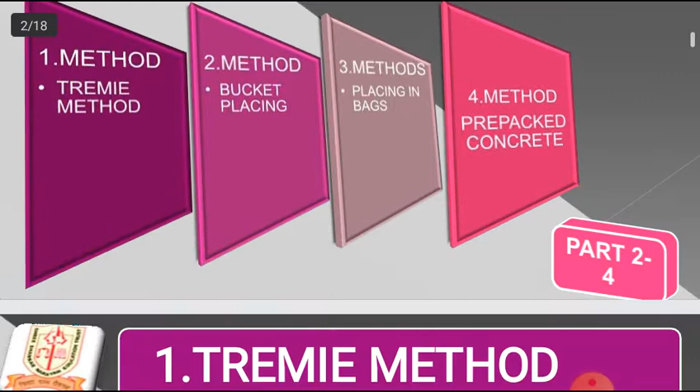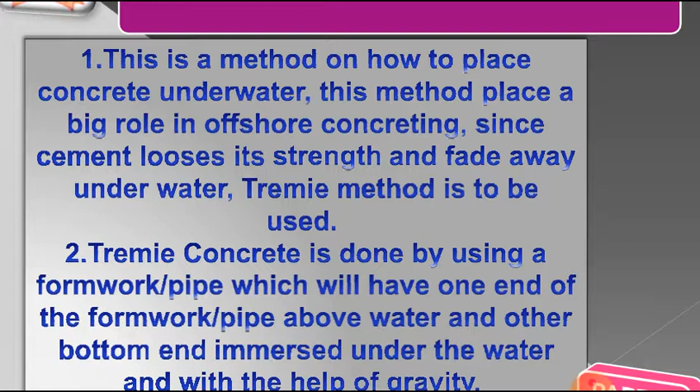The first one is the tremie method. This method plays a big role in offshore concreting since cement loses its strength and fades away underwater, so in this place a tremie method is to be used.

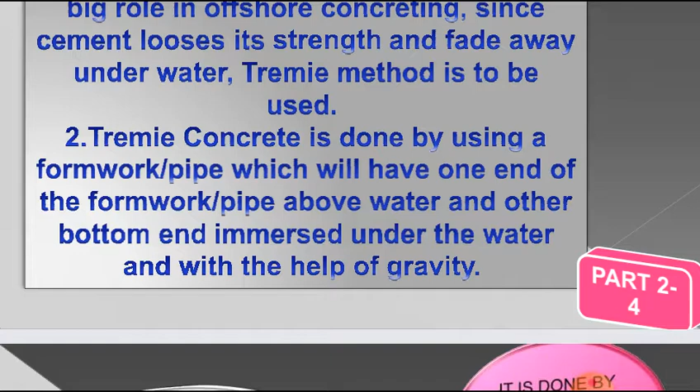This tremie concrete is done by using a formwork or pipe which will have one end above water and the other bottom end immersed under the water with the help of gravity. So here in this picture, it is done by placing pipes, one end in the water and one outside.

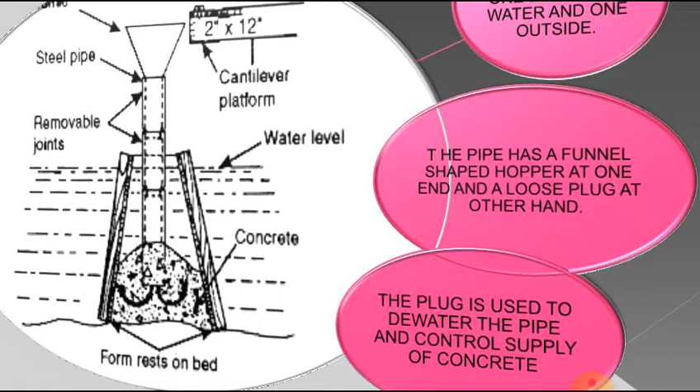The pipe has a funnel-shaped hopper at one end, that is at the top, and a loose plug at the other end, that is at the bottom. The plug is used to dewater the pipe and control the supply of concrete.

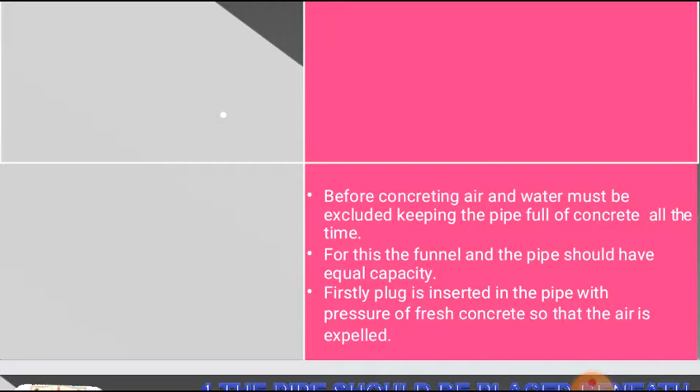Before concreting, air and water must be excluded, keeping the pipe full of concrete all the time. For this, the funnel and the pipe should have equal capacity. Firstly, the plug is inserted in the pipe with pressure of fresh concrete so that the air is expelled.

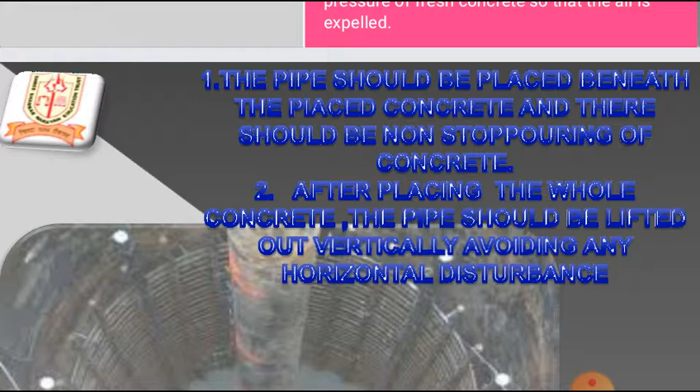The pipe should be placed beneath the placed concrete, and there should be a non-stop pouring of concrete. After placing the whole concrete, the pipe should be lifted out vertically, avoiding any horizontal disturbance. So it looks like this - the concrete is poured.

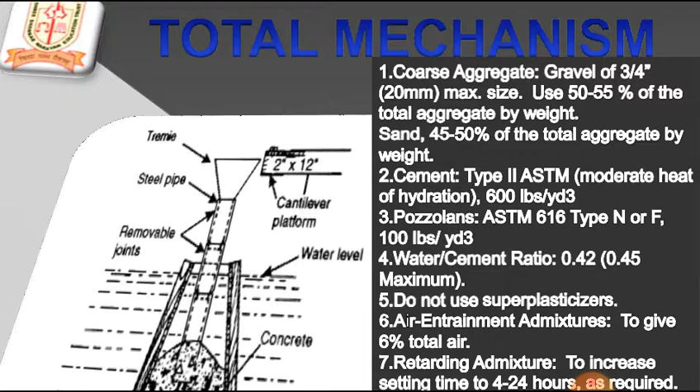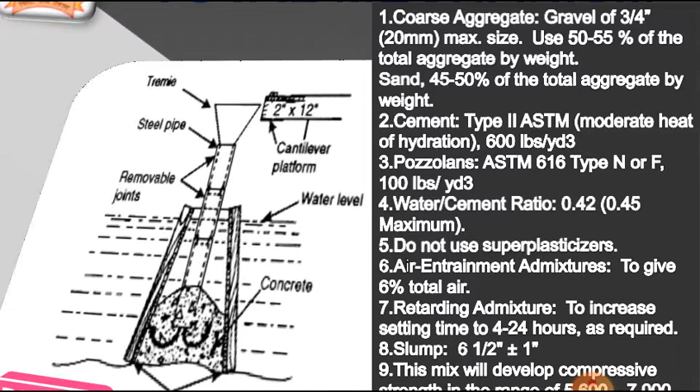Some basic information about the ingredients: the coarse aggregate is maximum 20 mm size, used at 50 to 55% of the total aggregate by weight, and sand is 45 to 50% of the total aggregate by weight. The cement is type 2 ASTM, and the pozzolans are ASTM 616 type N or F. The water cement ratio maximum is 0.45, and we should not use super plasticizers. The air entrained admixtures are used to give 6% total air.

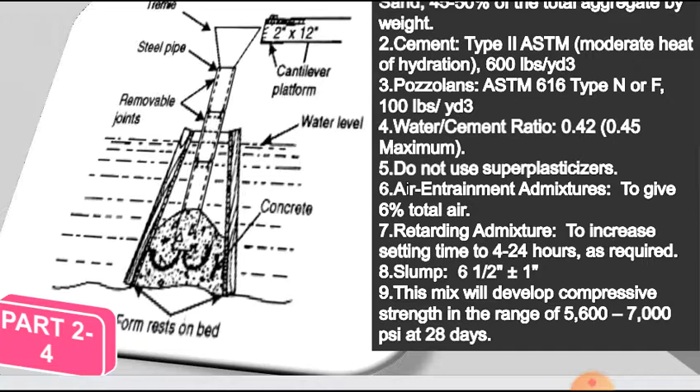The retarding admixture increases setting time to 4 to 24 hours as required, and the slump is 6.5 inches plus or minus 1. This mix will develop compressive strength in the range of 5,600 to 7,000 psi at 28 days. The next method is underwater concreting by bucket placing method.

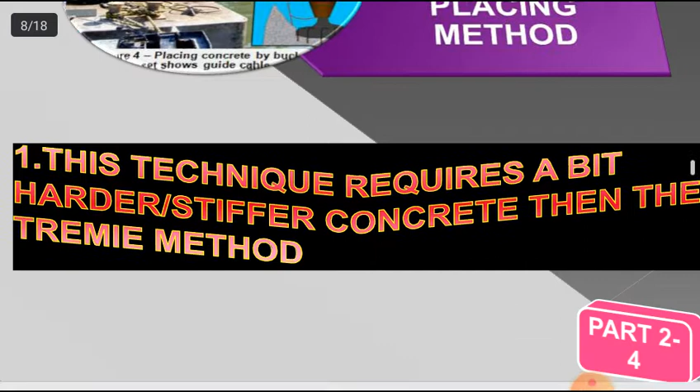This technique requires a bit harder or stiffer concrete than the tremie method. The buckets are usually fitted with a drop bottom or a bottom roller gate which opens freely outward when tripped.

The bucket is fully filled with concrete and its top covered with a canvas cloth or gunny bag to avoid disturbance of concrete as the bucket is lowered within water.

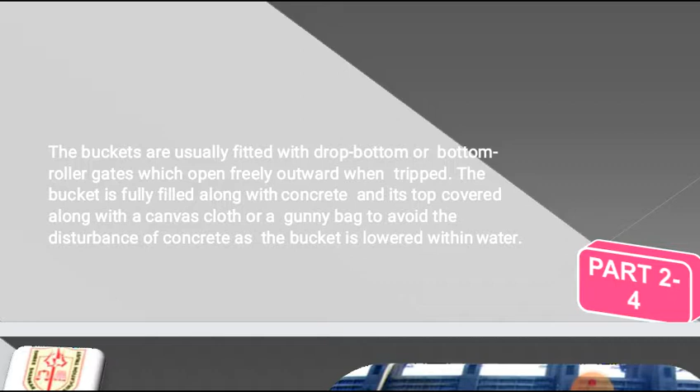So in this picture we can see the bucket is lowered through a crane up to the bottom surface of concrete and then opened by a suitable arrangement provided at the top. The concrete should be discharged straight against the surface on which it is deposited.

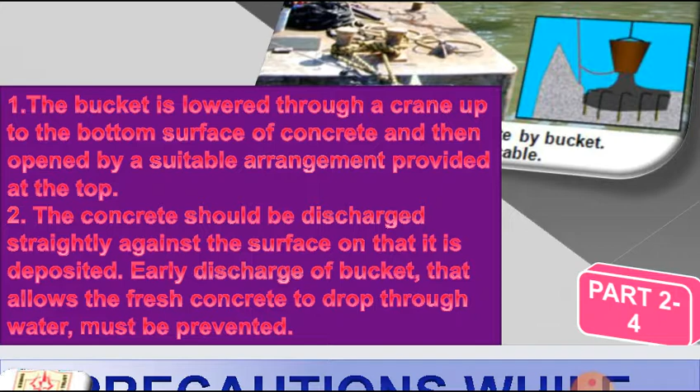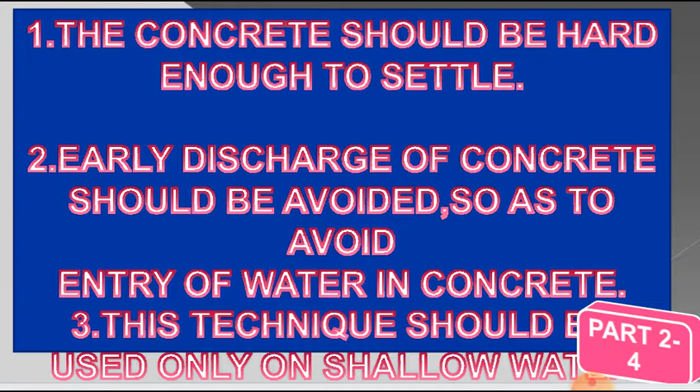Early discharge of the bucket that allows fresh concrete to drop through water must be prevented. Some precautions: concrete should be hard enough to settle, and early discharge should be avoided so as to avoid entry of water into concrete. This technique should be used only in shallow water.

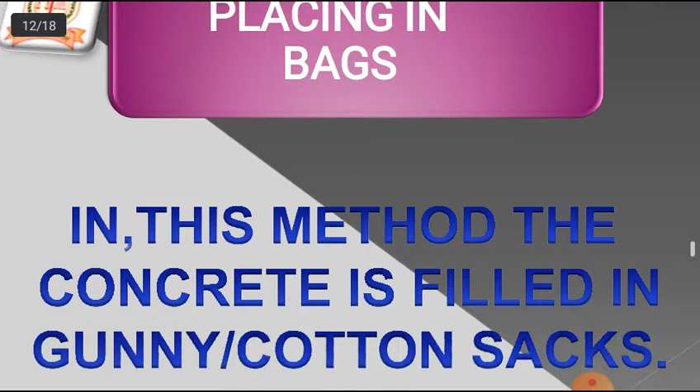The next method is placing in bags. In this method the concrete is filled either in gunny or cotton sacks.

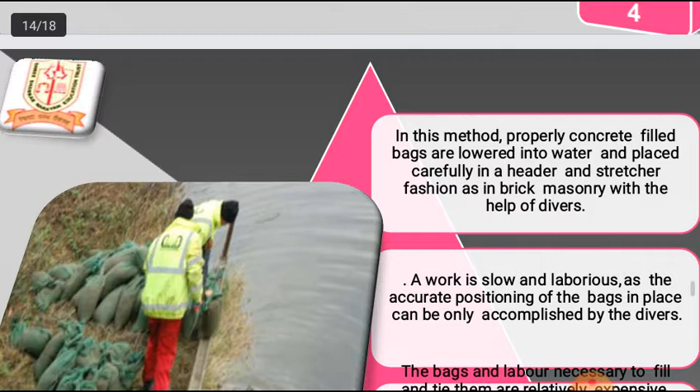So in this picture we can see, in this method, properly concrete-filled bags are lowered into the water and placed carefully in a header and stretcher fashion as in brick masonry with the help of divers. All the gunny bags filled with concrete are placed in a stretcher and header manner as done in brick masonry.

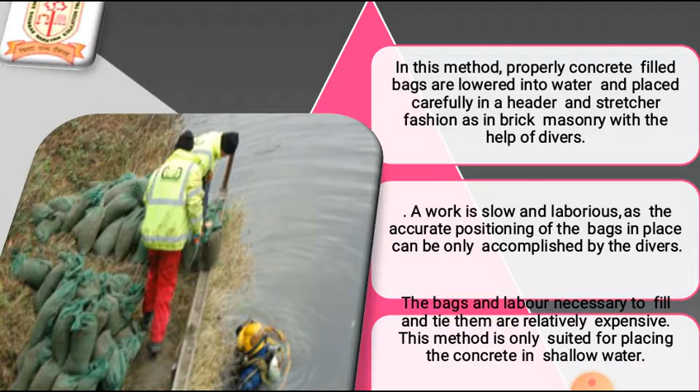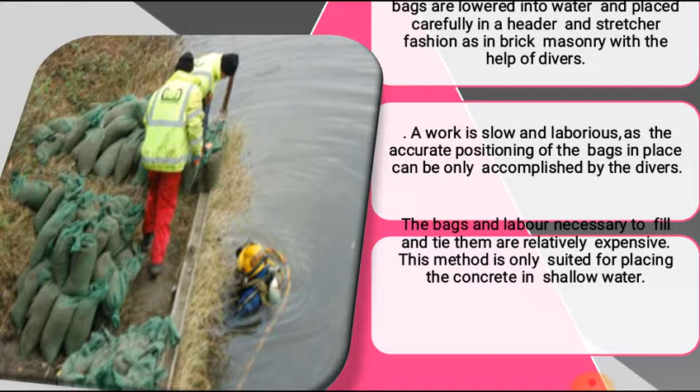This work is slow and laborious as accurate positioning of the bags in place can only be accomplished by divers. The bags and the labor necessary to fill and tie them are relatively expensive, so this method is only suited for placing concrete in shallow water.

The last method is pre-packed concrete. In this method, the aggregate should be wetted before placing in position. This method is also called grouted concrete.

It consists of placing the coarse aggregate only in the form and thoroughly compacting it to form a pre-packed mass. This mass is then grouted with cement mortar of the required proportions. The mortar that grouts the concrete displaces water and fills the voids.

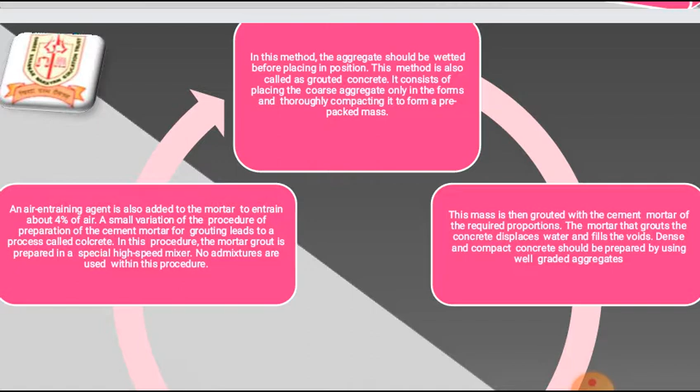Dense and compact concrete should be prepared using well-graded aggregates. The maximum size of aggregate is 80 mm, and the coarse aggregate may also be allowed to fall from a height of up to 4 meters without causing any appreciable segregation. Just shutter vibration could be used to compact the coarse aggregates.

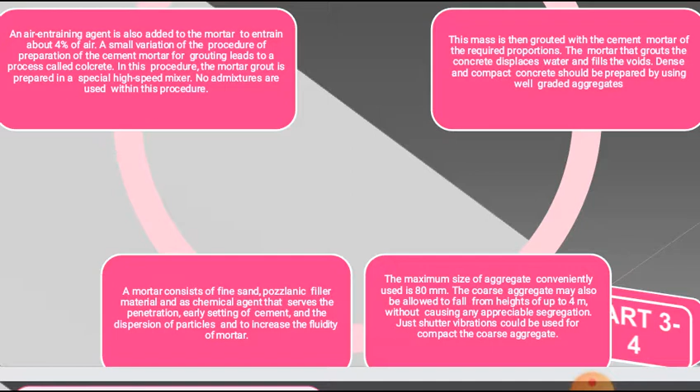A mortar consists of fine sand, pozzolanic filler material, and a chemical agent that serves penetration, early setting of cement, dispersion of particles, and increases fluidity of the mortar. An air entraining agent is also added to the mortar to entrain about 4% of air.

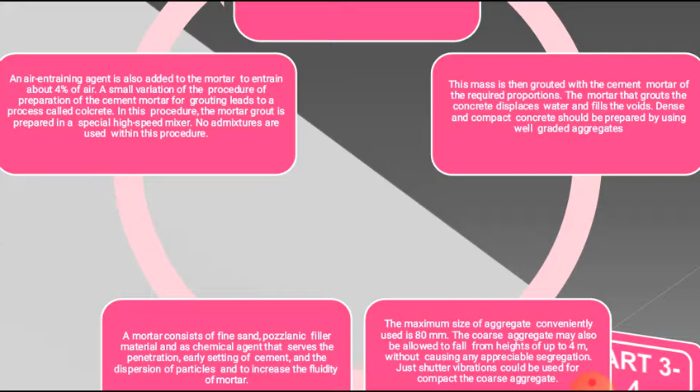A small variation of the procedure of preparation of the cement mortar for grouting leads to a process called colcrete. In this procedure, the mortar grout is prepared in a special high-speed mixer, and no admixtures are used in this procedure.

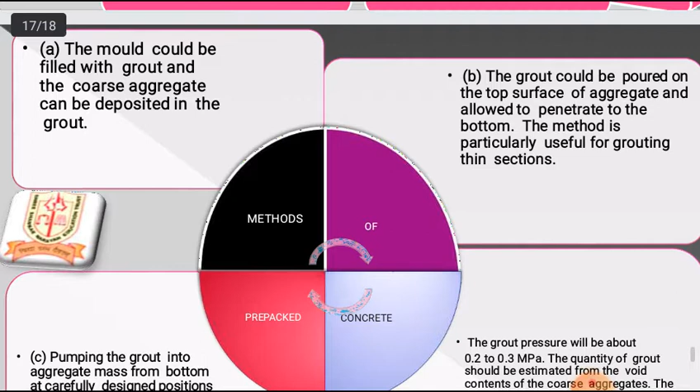Some methods of pre-packed concrete: first, the mold could be filled with grout and the coarse aggregate can be deposited in the grout. The second method is the grout could be poured on the top surface of aggregate and allowed to penetrate to the bottom, which is particularly useful for grouting thin sections.

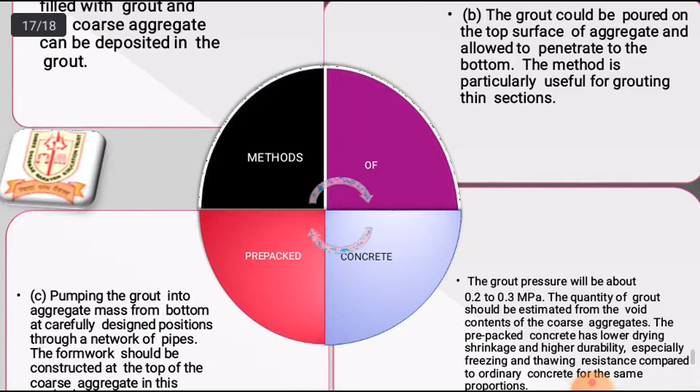The grout pressure will be about 0.2 to 0.3 megapascal, and the quantity of grout should be estimated from the void content of the coarse aggregate. The pre-packed concrete has lower drying shrinkage and higher durability, especially freezing and thawing resistance, compared to ordinary concrete for the same proportions.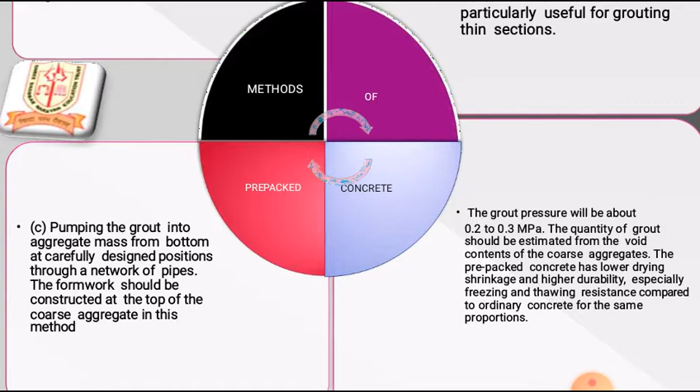The third method is pumping the grout into the aggregate mass from the bottom at carefully designed positions through a network of pipes. The formwork should be constructed at the top of the coarse aggregate in this method. So these are the 3 methods available for pre-packed concrete.

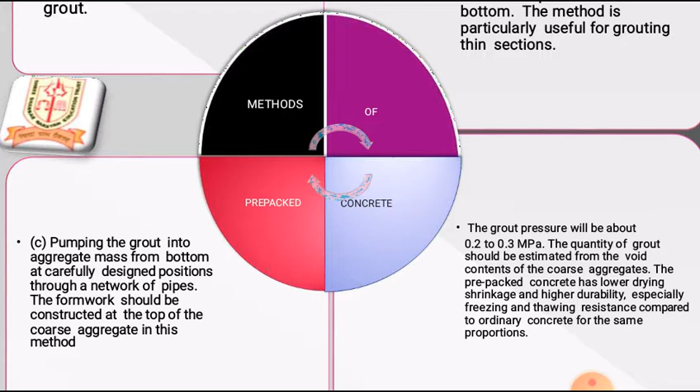So in this module we have seen some 4 methods of underwater concreting. Thank you.